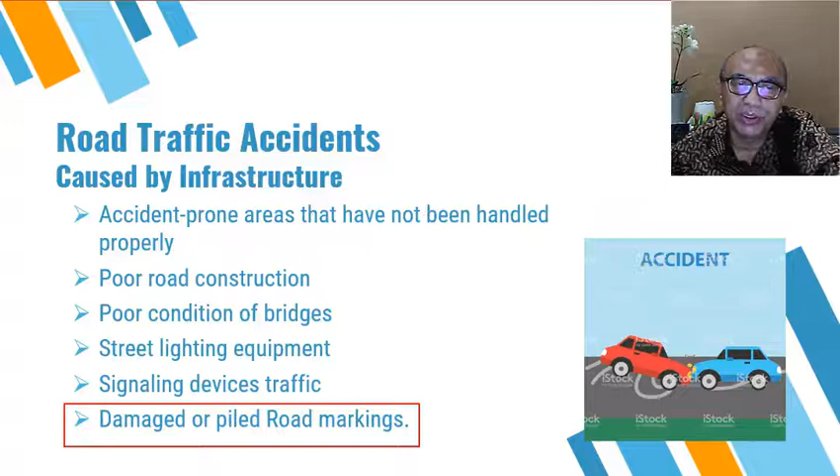To avoid further accidents, this damaged or piled road marking needs to be replaced. However, the most widely used equipment for removing road marking in Indonesia is operated manually, pushed by hand by the operators.

This manual method is extremely inefficient, especially when it needs to remove road marking on very long roads.

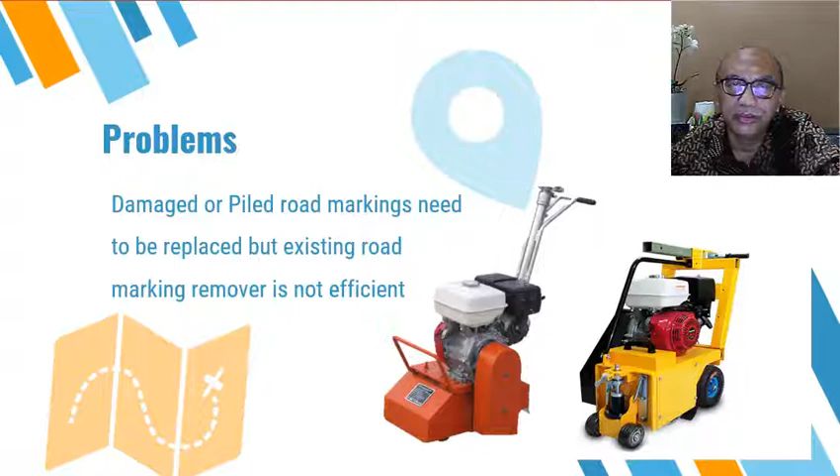To cater to that problem, we designed and built a more efficient road marking removal equipment that can be attached to a small truck or pickup, and it is driven by hydraulic power.

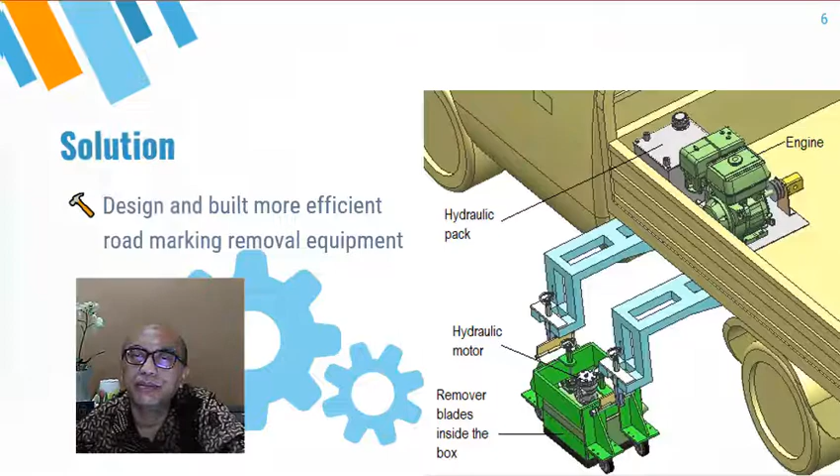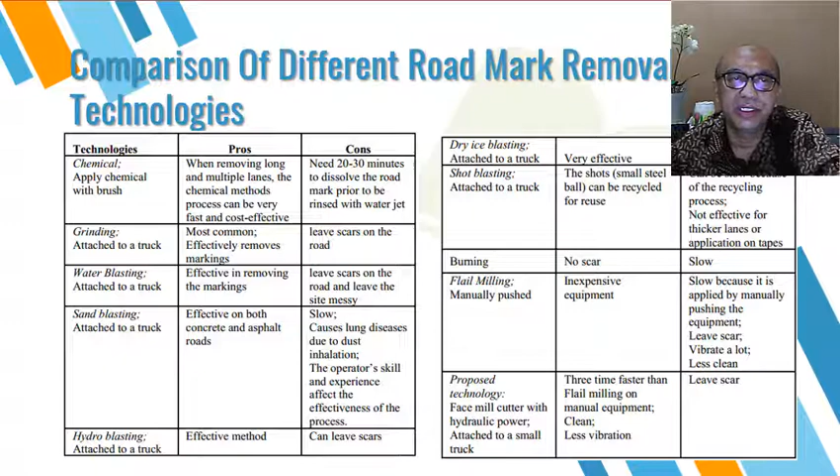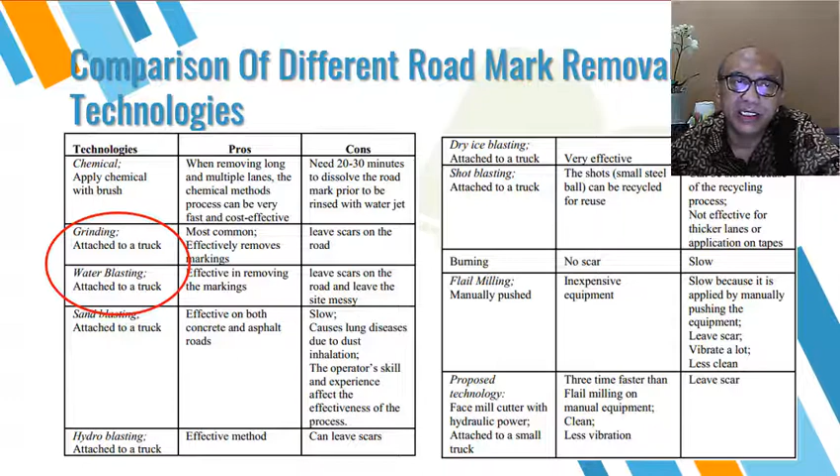In order to design this new equipment, we studied different road mark removal technologies. Among them, two methods are widely used in the world: grinding and water blasting. In Indonesia, grinding is used manually, and therefore it is not efficient.

We propose a new technology using a face mill cutter with hydraulic power, attached to a small truck.

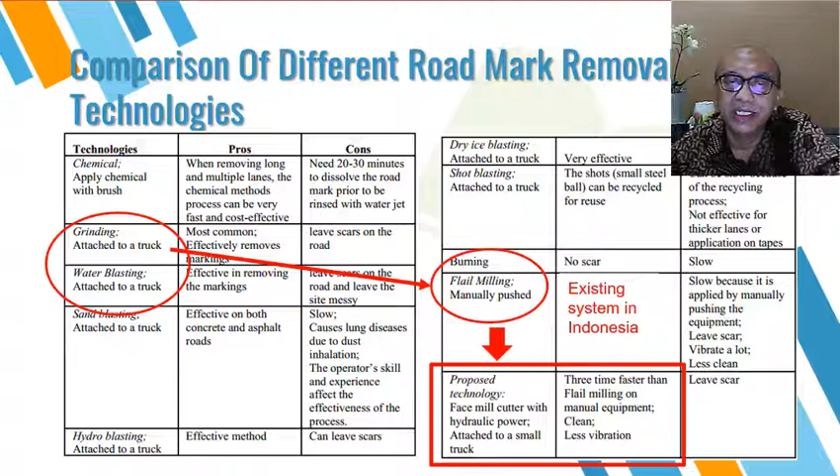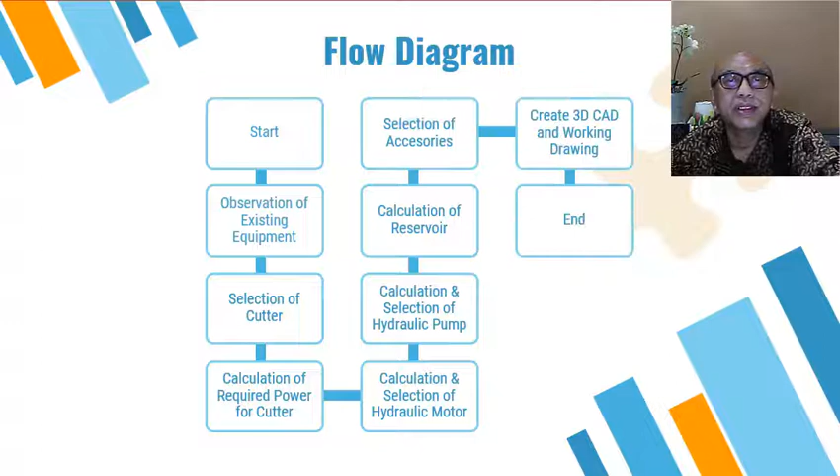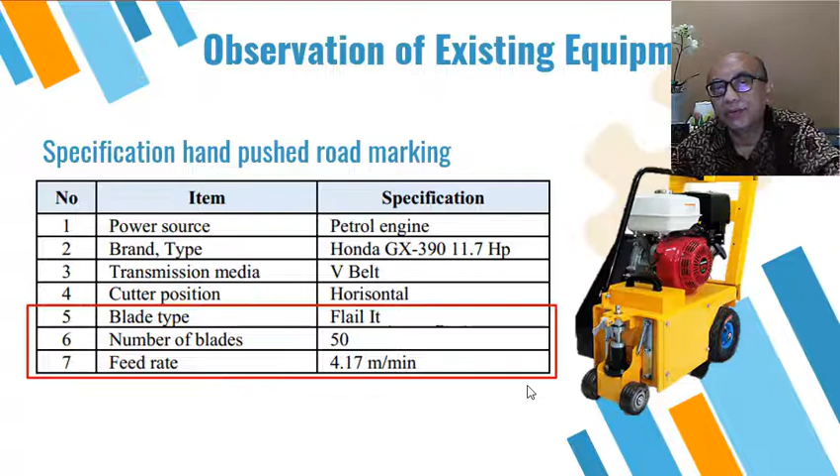The design methodology is presented in the following flow diagram. As a result, the existing equipment uses a petrol engine with a power of 11.7 horsepower, the cutter position is horizontal, the blade type is flail, the number of blades is 50, and the feed rate is 4.17 meters per minute.

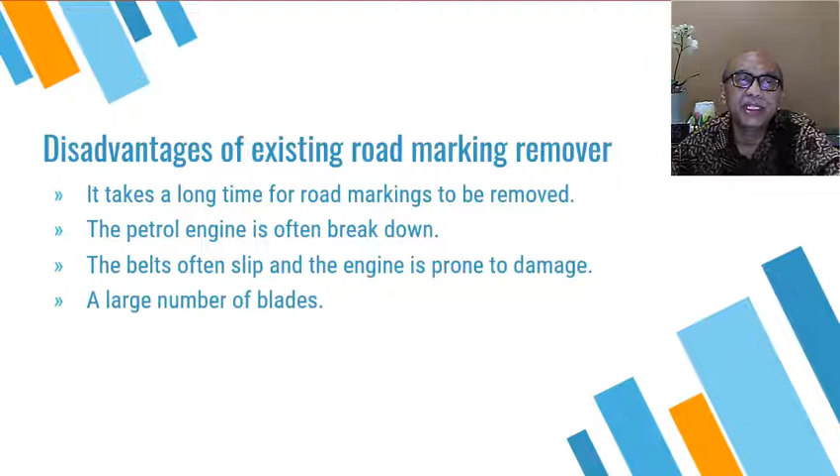There are disadvantages of the existing road marking removal equipment, such as it takes a long time for road marking to be removed, the petrol engine often breaks down, the belt frequently slips, the engine is prone to damage, and there is a large number of blades needed.

It only relies on the weight of the equipment to damp vibration and upward thrust, and because it uses a horizontal flail cutter type, the removal is less clean.

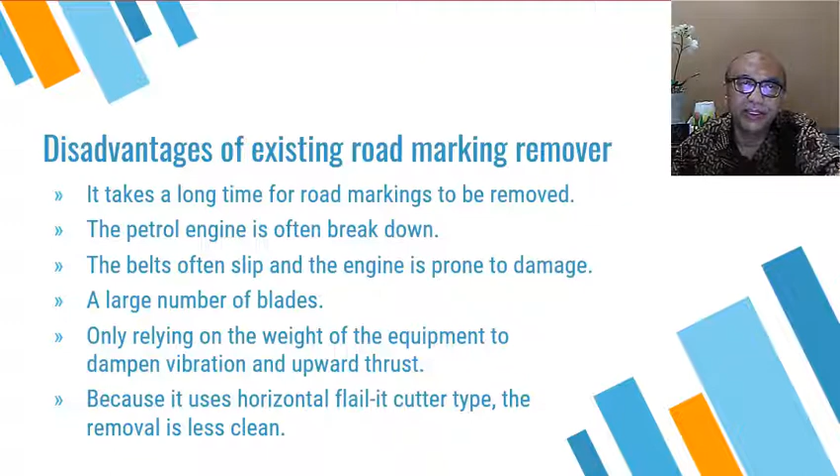Next, we determined the power source of the road marking removal equipment. There are several consideration factors: first, the power required to remove road marking; it must absorb shock loads from the removal process; it must be resistant to dust from road mark removal; and there must be overload protection.

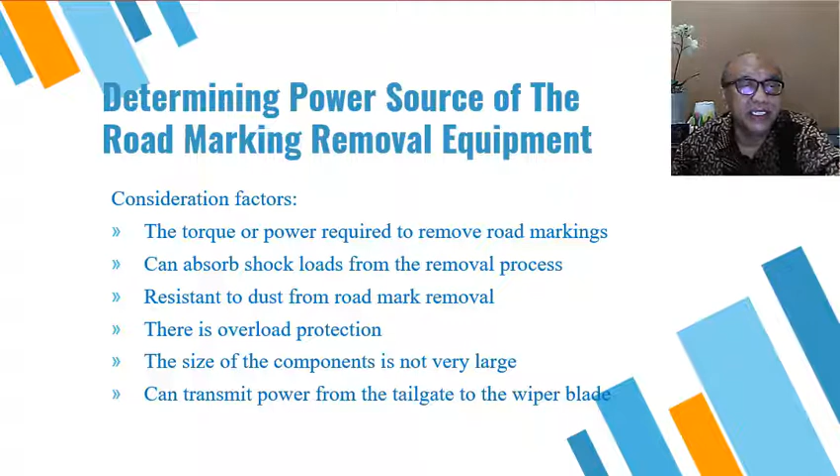Also, the size of the component should not be very large, and it should transmit power from the tailgate to the wiper blades. The decision is to select hydraulic power, as it can meet the requirements, especially absorbing shock loads from the removal process and transmitting power from the tailgate to the wiper blade.

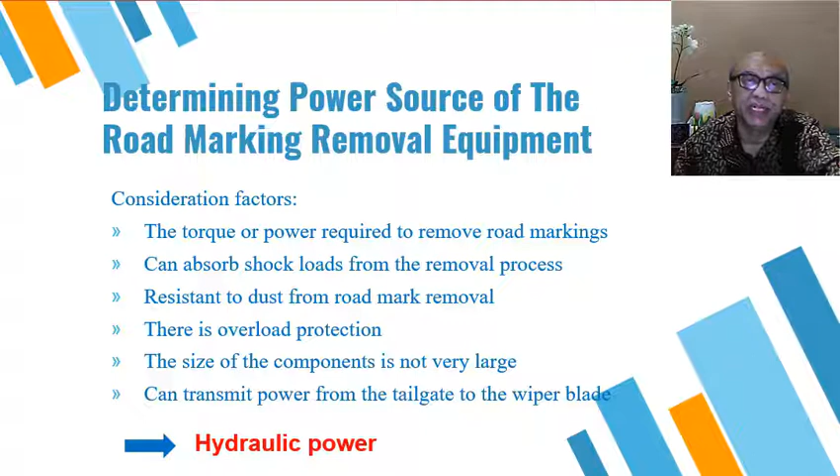So the road mark removal cutter should meet the following requirements: can remove road marking and concrete materials, is hard on the outside and soft on the inside, can remove road marking with a width of 150 millimeters, and can remove road marking with a thickness of 7 millimeters.

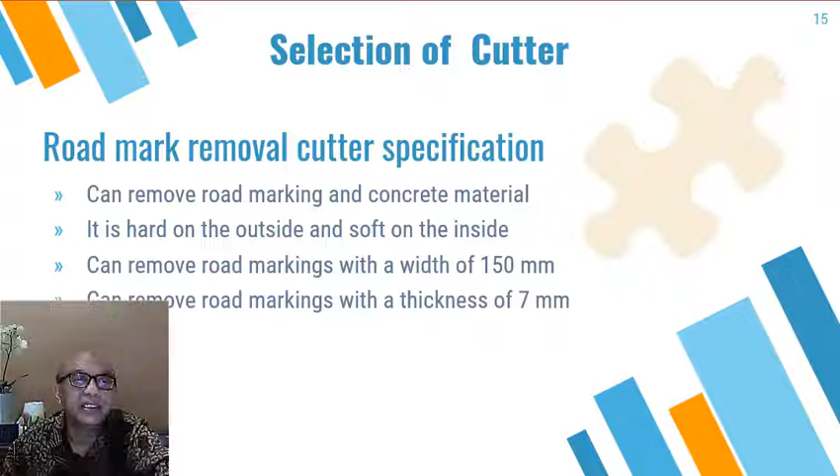The selected cutter is the Face Mill WFX12200R from Sumitomo. The existing equipment uses a flail type cutter, with many cutter blades in the grinding wheel, while the new cutter will produce a cleaner surface.

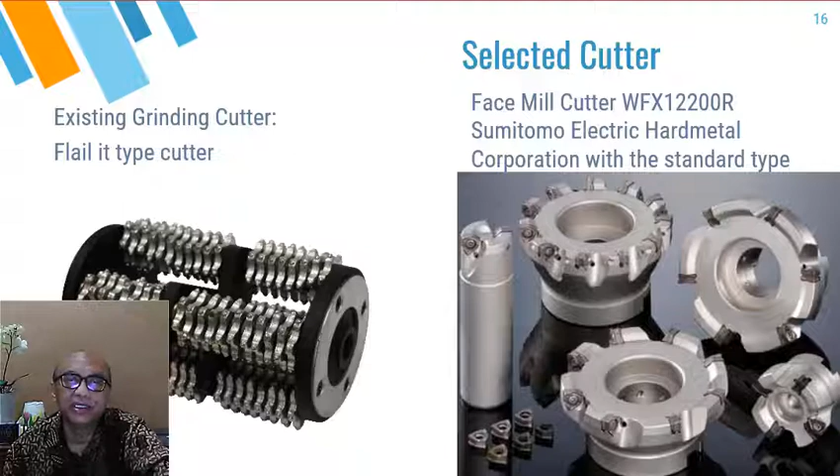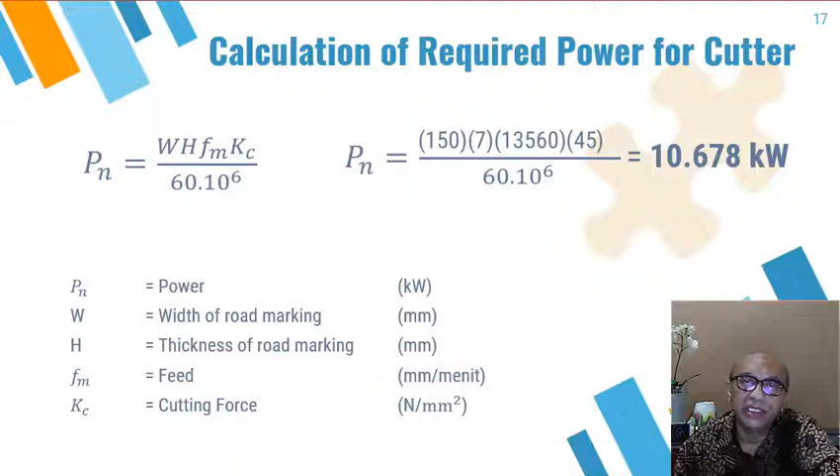The next step is to calculate the power needed by the cutter. From the calculation, it is found that the power needed to drive the cutter is 10.678 kilowatts.

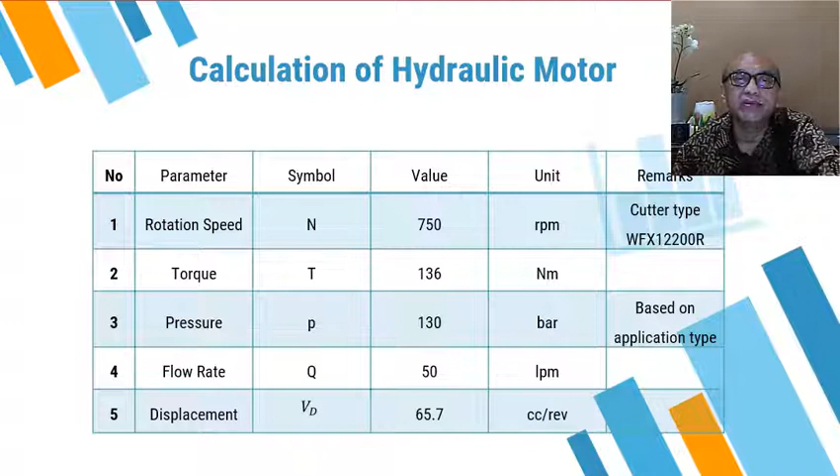Then we calculated the hydraulic motor based on the rotation speed from the catalog, which is 750 RPM, with a torque of 136 Newton meters, a pressure of 130 bar, a flow rate of 50 liters per minute, and a displacement of 65.7 cc per revolution.

The selected hydraulic motor is the Danfoss OMR 80, which has a displacement of 80.3 cc per revolution.

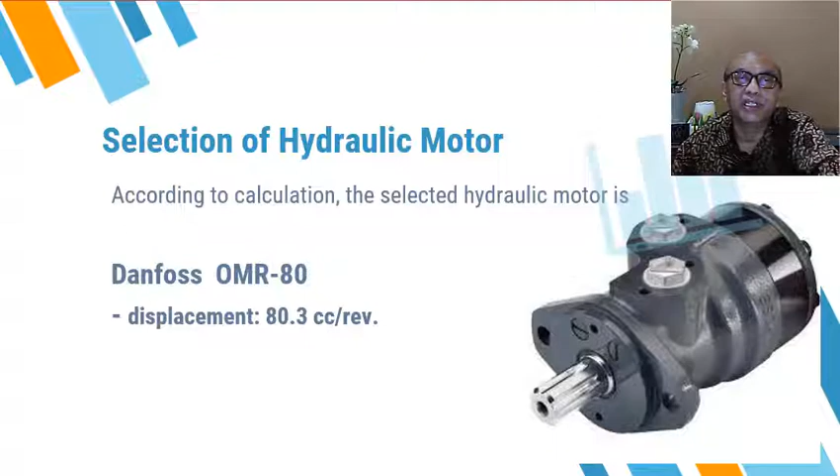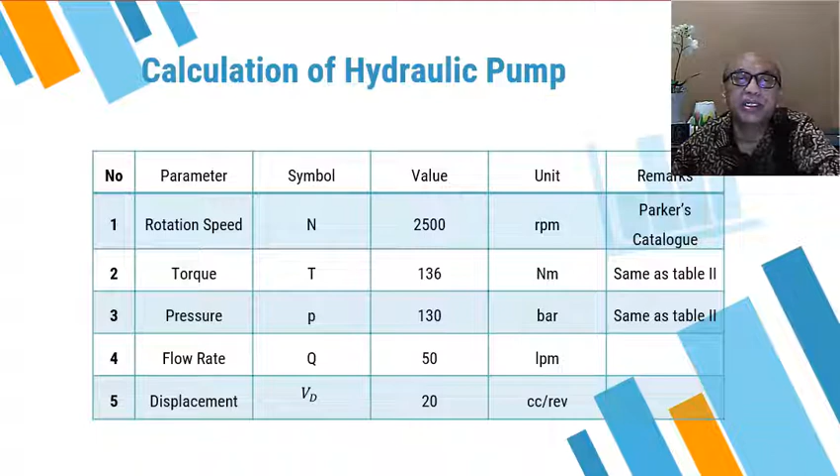The calculation of the hydraulic pump resulted in a rotation speed of 2,500 RPM from the catalog, a torque of 136 Newton meters, a pressure of 130 bar, a flow rate of 50 liters per minute, and a displacement of 20 cc per revolution.

The selected hydraulic pump is the Parker Hydraulic Pump 0210 with a displacement of 21 cc per revolution.

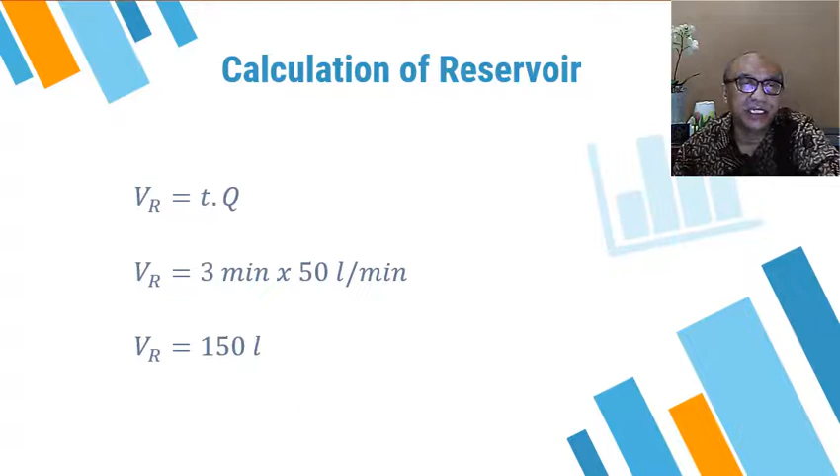The reservoir capacity calculation resulted in a 150 liter capacity. The accessories needed to equip this hydraulic system include check valve, flow control, relief valve, and directional control valve.

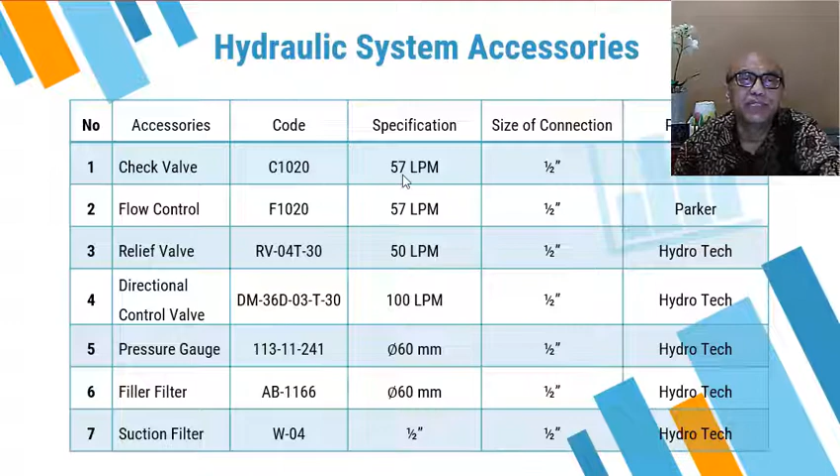Also needed are a pressure gauge, filler filter, and suction filter. This is the specification of this accessory system.

Finally, the 3D CAD and working drawing were developed. To conclude,

the cutter of this equipment uses the surface milling cutter WFX 12200R from Sumitomo, at a speed of 750 RPM. The removal rate is 13.56 meters per minute, 3 times larger than the existing system, which is 4.17 meters per minute.

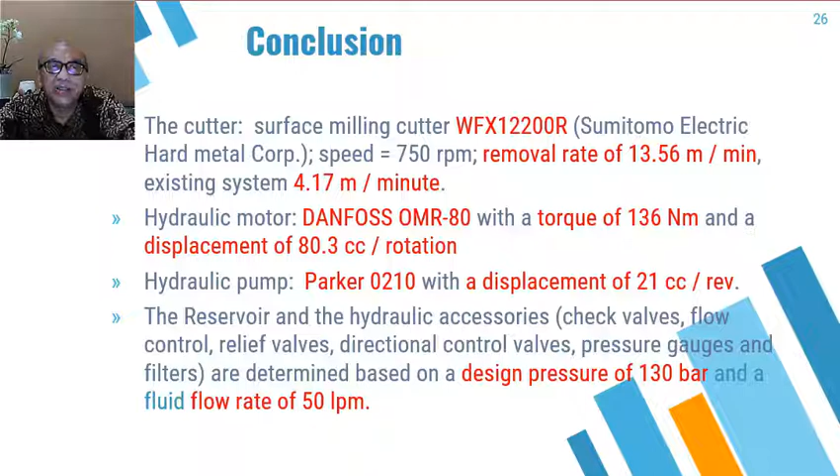The hydraulic motor is the Danfoss OMR 80 with a torque of 136 Newton meters and displacement of 80.3 cc per revolution. The hydraulic pump is the Parker 0210 with a displacement of 21 cc per revolution. The reservoir and hydraulic accessories are determined based on a design pressure of 130 bar and a fluid flow rate of 50 liters per minute.

For further research, we suggest automatic control of the removal rate. In the existing design, the removal rate is controlled by the driver of the car, and it is not constant.

The next suggestion is that so far we haven't considered the safety of operating this equipment, so further research can focus on how to operate the equipment safely. Thank you.